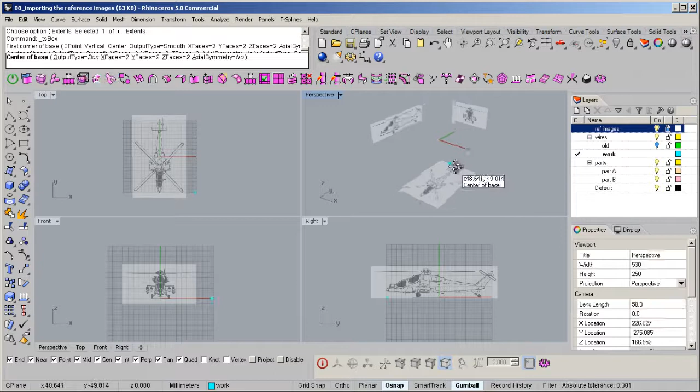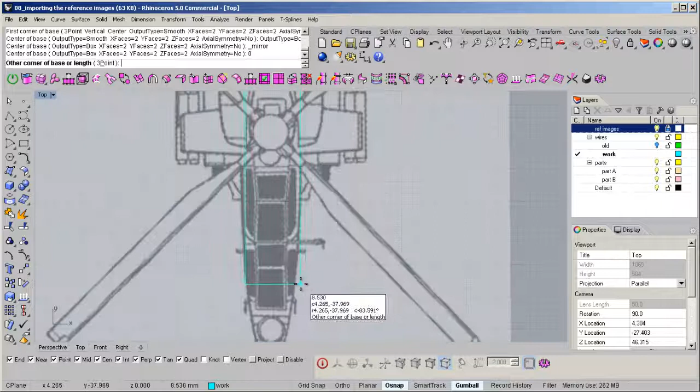I'm going to hit the 0, draw from 0. You could start from the top view and just roughly get it to about the width of the body. It doesn't really matter if you get the whole thing covered. Looks about right. Next click, you have to go to the right view and just roughly get it to about here. And it will build you your T-Splines body.

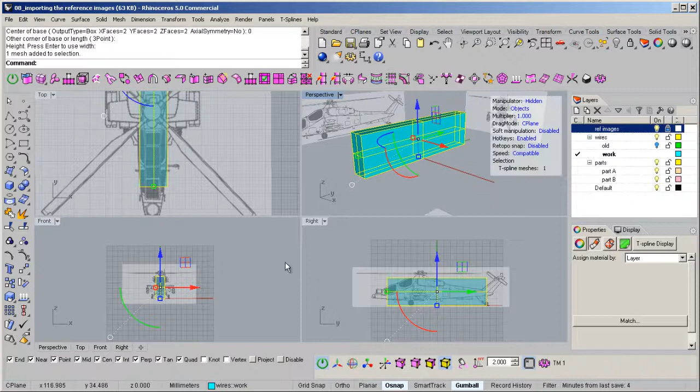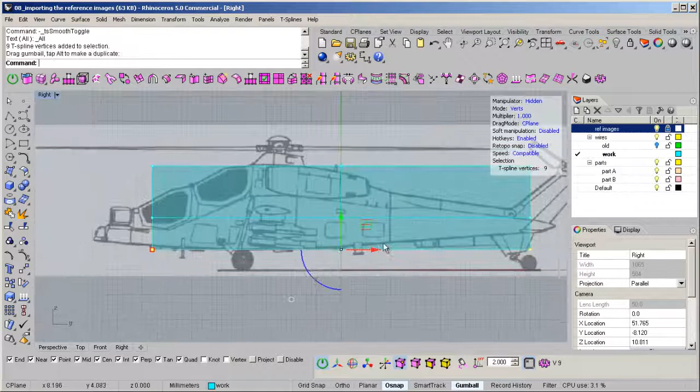Let's turn on the T-Splines toolbar with Control and Spacebar. I'm going to make sure the T-Splines work, so I'm going to hit the Tab key to toggle between smooth and box mode. So that works. So let's go to the A key to bring up the verts. I'm going to select the bottom row here, points, and just move these up. I'm going to turn off the gumball because you can use the T-Splines translates. These are great, but let's stick with the T-Splines for now.

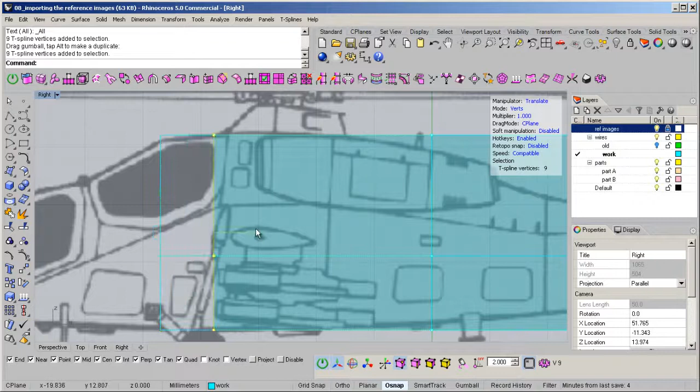I'm going to go to the W key to move and pull this one back roughly to before it starts to dip. So I'm going to pull it right to about here. We notice it's starting to dip very early here, so I'll take this group and pull it back, and we'll pull this one a little farther back as well because it starts to dip. Well, it starts to dip pretty much around here, so here's a good area.

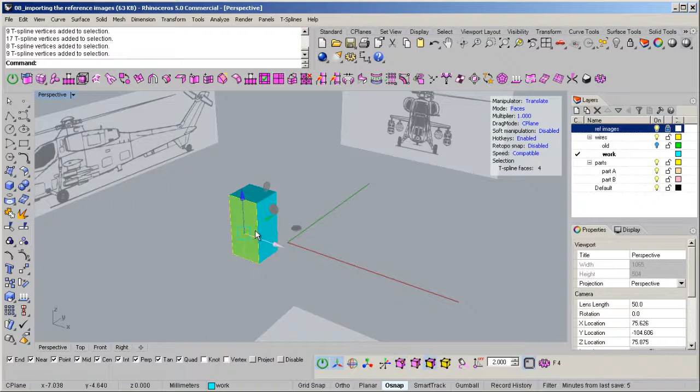We'll select this entire group of verts from left to right with the marquee box. If we switch over to the perspective, you'll notice they're all selected. If I hit the D key, it goes into face mode with all of them selected. Let's go to this icon here to extrude the face. Now we can pull it out. Switch over to the right view and just zoom in a bit.

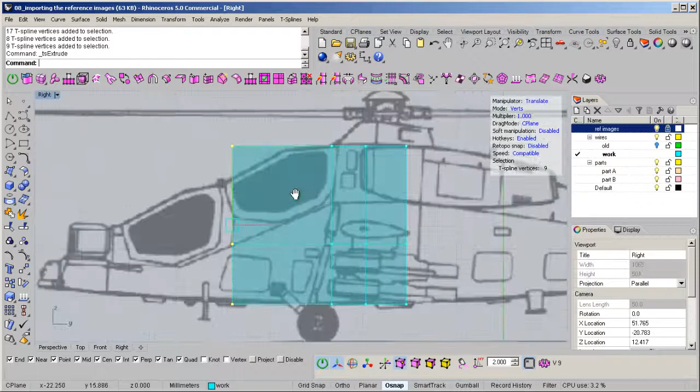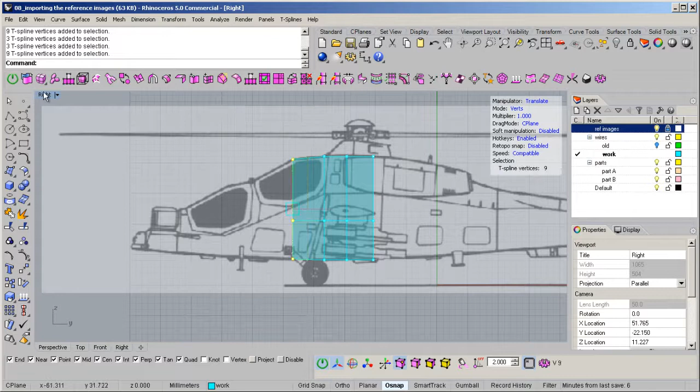Switch over to the A key so we can go with the verts. I'm going to pull it back just a tiny bit. And we could start by shaping this vert to follow the cockpit right there. And let's pull this one up a little bit. We'll select the front verts again. Switch over to the D key. I put some commands in my pop-up menu so I can access them pretty quickly. Go to the extrude face command again. Pull this one out roughly to where this meets down here.

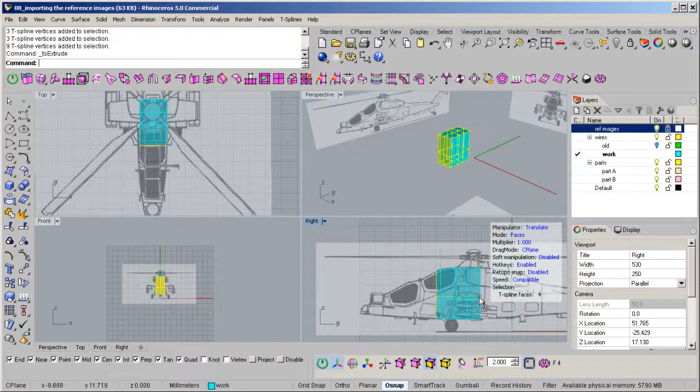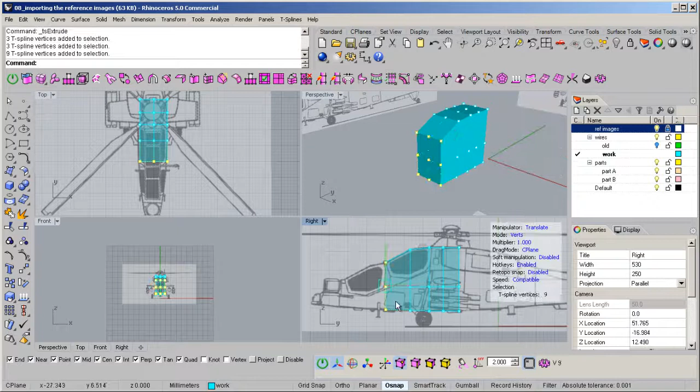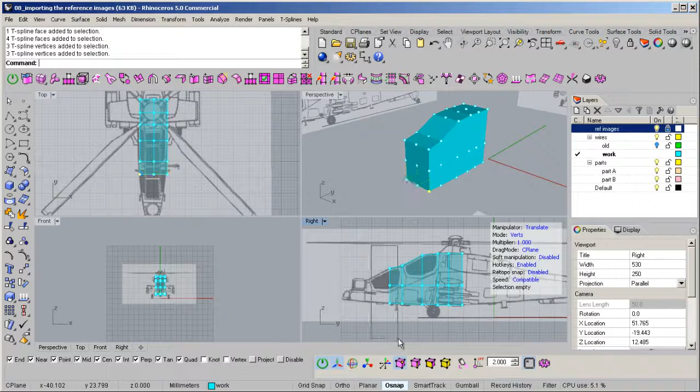Back to vert mode, and let's pull this one down and pull this a little higher. Select all the verts again. Back to the D key, so we're in face mode. Extrude face. Let's pull this out roughly to that corner. There we go. Back to vert mode and pull this down. Okay. And let's keep going until we finish the front end.

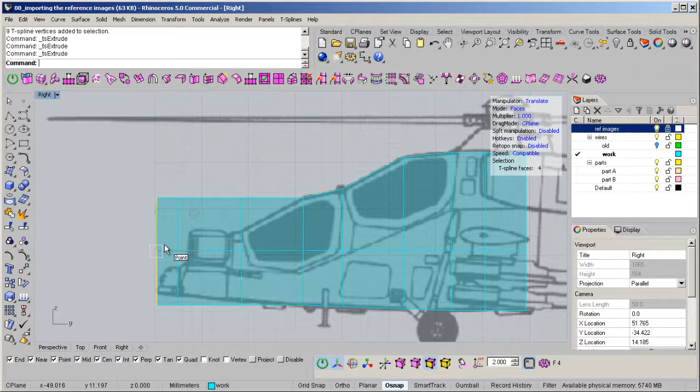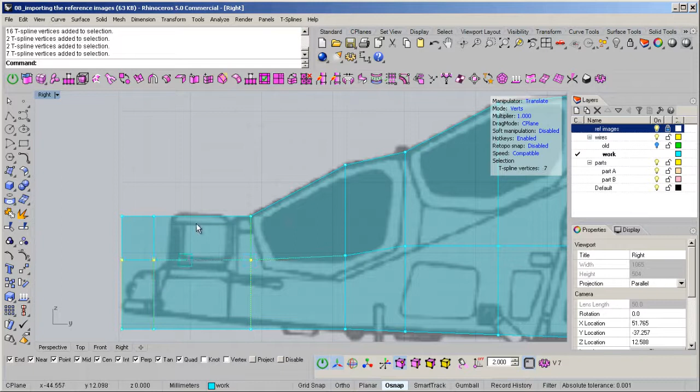So extrude again. I'll pull this out roughly to that corner. I'm going to hit the enter key again so I can just do it several more times. Roughly to here, and one more time. There we go. Back to the A key. Let's take these top two here. I'm going to scale it down just like this. Back to the W key. And we can start to even these out. Looks good. And take these two here and pull it up.

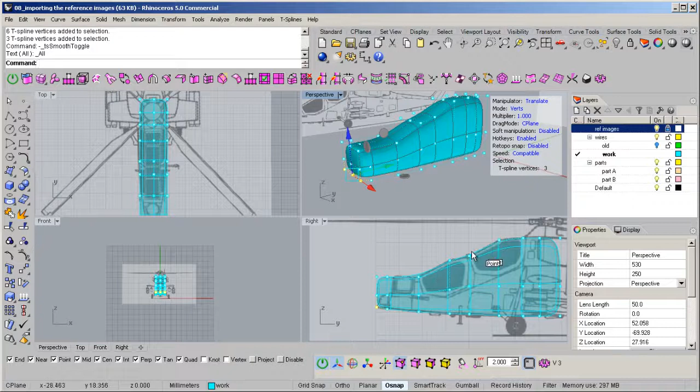All right. We can verify it works by hitting the tab key. Everything is still lined up correctly. That's good. Now let's focus on the rear. Back to the D key, so we're in face mode. We can do the extrusion again. Pull this farther back. I'm going to go right around to here, hit the enter key, pull it again, hit the enter key. Let's pull it again to about here. Actually, yeah, pull it here, hit the enter key, and pull it again to the end. There you go.

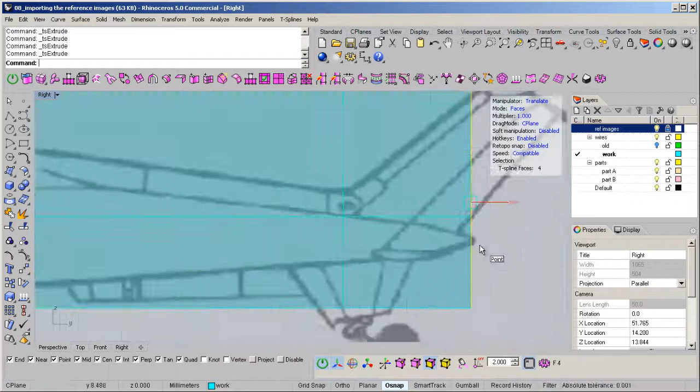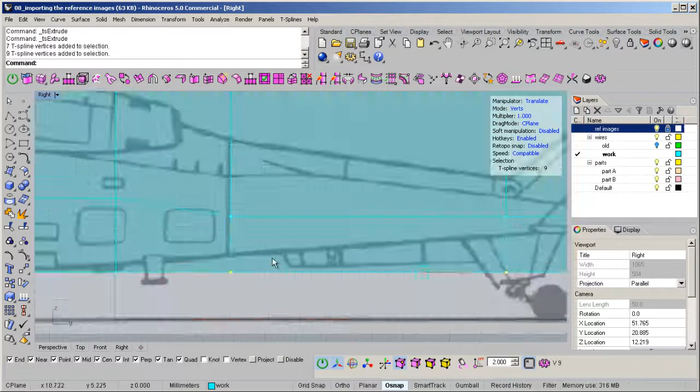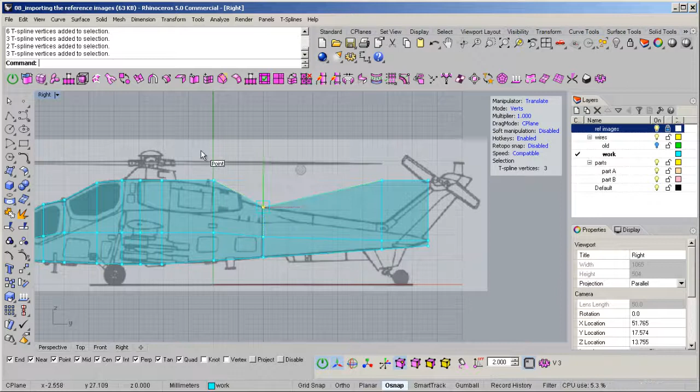Switch over to the A key, so we're in vert mode. We can take this group here and line it up so the point is at the tip. Then we can take this one and pull it up, line that up, and there we go. Again, we can always adjust these later, so it's not a big deal if you're not accurate. We'll pull this down. Guesstimate's right around there. This can come down here, and the last one should be a little sharper. That should be right.

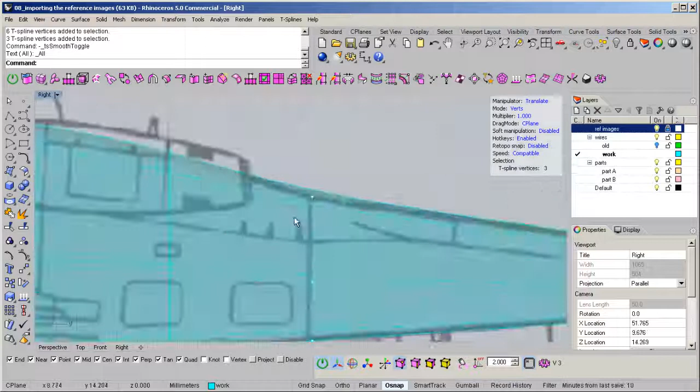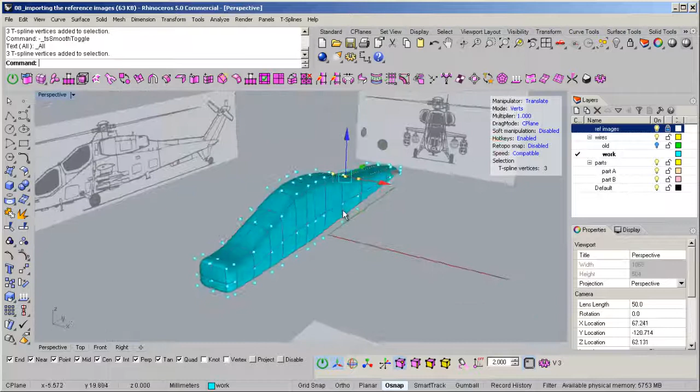We can go here now in sub D mode and pull this one down so it's a little more accurate. Don't worry about the sharp corners. We're going to be defining those a little later. Next thing I want to do, I want to go to object mode, which is the F key. Hit the tab key, so we're in box mode again. Select your model. Let's go to the symmetry icon here and left click.

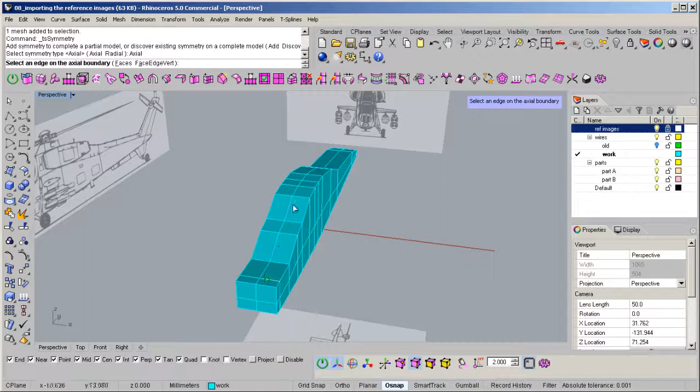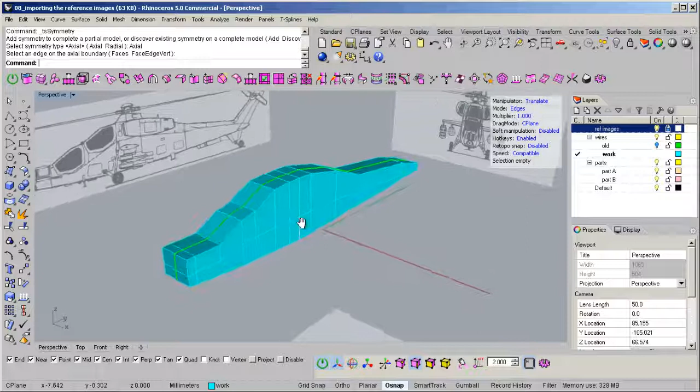Next thing you want to do, you want to go to discover, axial, and select the curve that's on this middle line here. We'll set up our symmetry so we can just model one half and the other side will update. All right, looks like we got the beginning phase of our model. In the next lesson, we will continue to define the body of this helicopter.